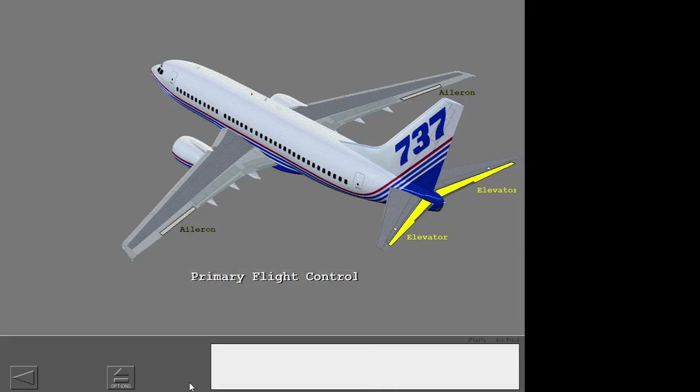Pilots use the primary and secondary flight control surfaces to move the airplane in flight. The primary flight controls are the ailerons, the elevators, and the rudder. The secondary flight controls are the spoilers and the high lift devices.

The spoiler speed brake system is made up of flight and ground spoilers. The flight spoilers can move to aid the ailerons with roll control, or they can be used to slow the airplane. After landing, the ground spoilers deploy with the flight spoilers to slow the airplane.

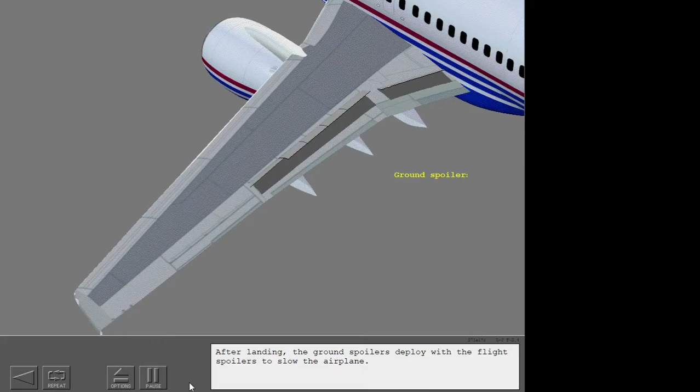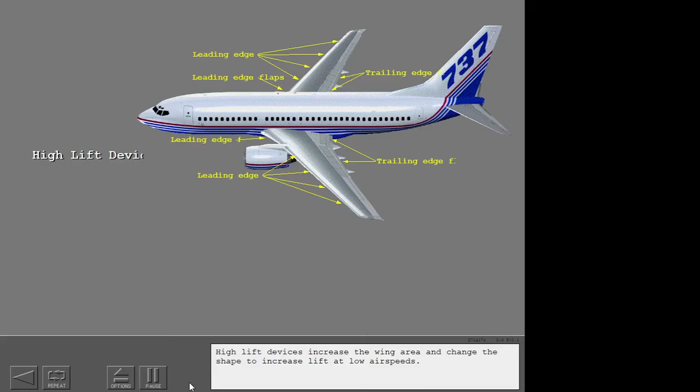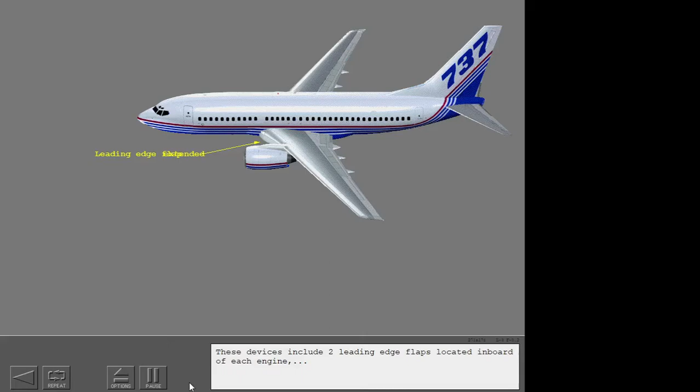High lift devices increase the wing area and change the shape to increase lift at low air speeds. These devices include two leading-edge flaps located inboard of each engine, four leading-edge slats located outboard of each engine, and inboard and outboard double-slotted flaps on the trailing edge of each wing.

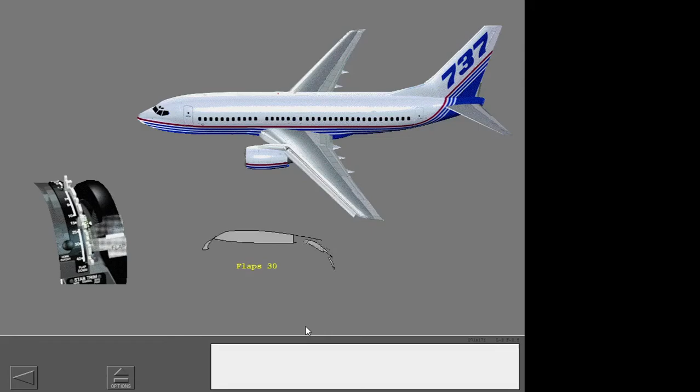Flap positions 1 through 15 supply increased lift with only a small change in drag. Flap positions more than 15 supply increased lift and drag to permit slower approach speeds and better airplane control.

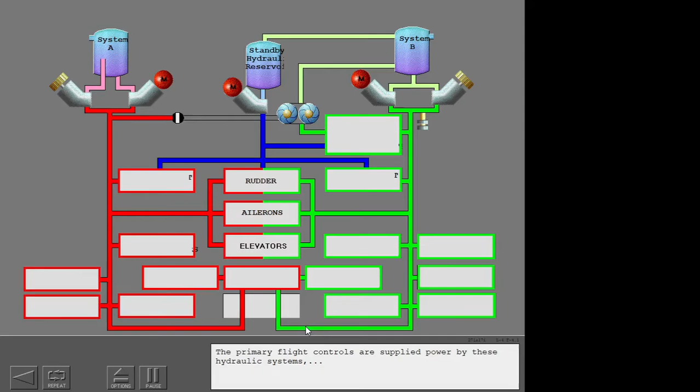The primary flight controls are supplied power by these hydraulic systems, and the secondary flight controls are powered by these.

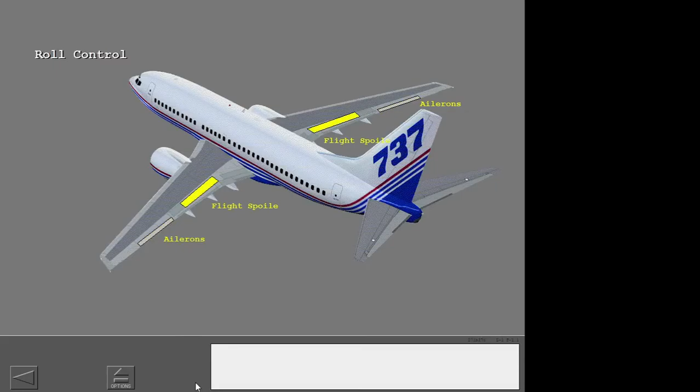The ailerons are the primary surfaces for roll control. The flight spoilers assist the ailerons.

Roll commands come from the control wheels and the autopilot. The control wheels are connected to each other and then connected by cables to the aileron power control units, or PCUs.

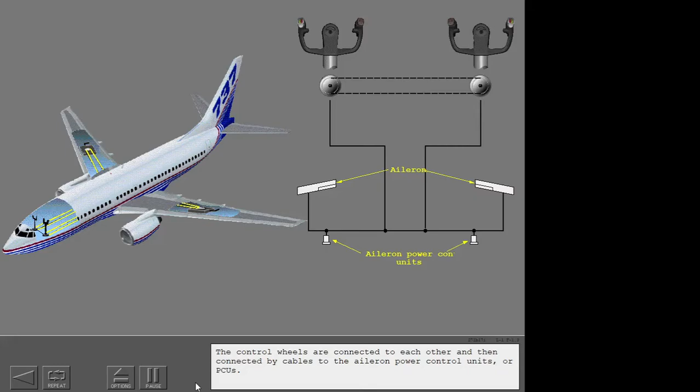Hydraulic systems A and B supply power to the aileron PCUs and the flight spoiler PCUs.

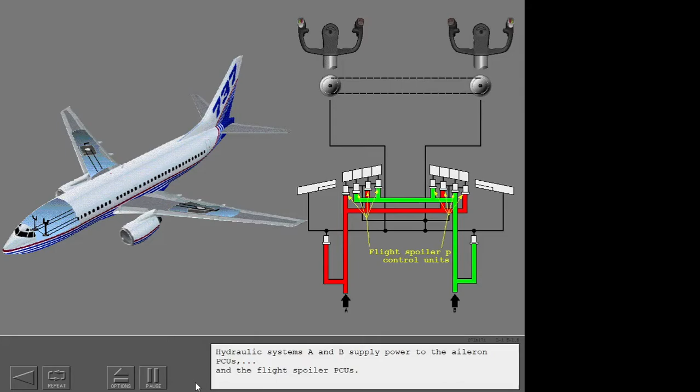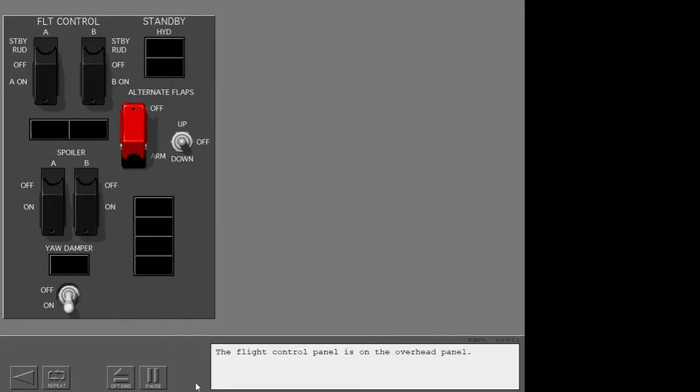The flight control panel is on the overhead panel. The flight control switches are usually in the guard closed on position, which lets the related hydraulic system supply power to the flight control system.

The spoiler switches are for maintenance personnel to do system tests.

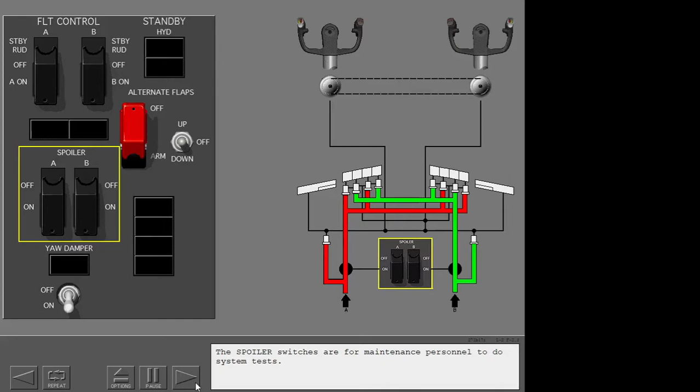Controls for the aileron trim system are at the aft end of the aisle stand. The aileron trim indicators are on the top of the control columns.

The aileron trim switches send an electrical signal to the feel and centering mechanism to set new aileron and control wheel positions. The trim switches must move together for the system to work.

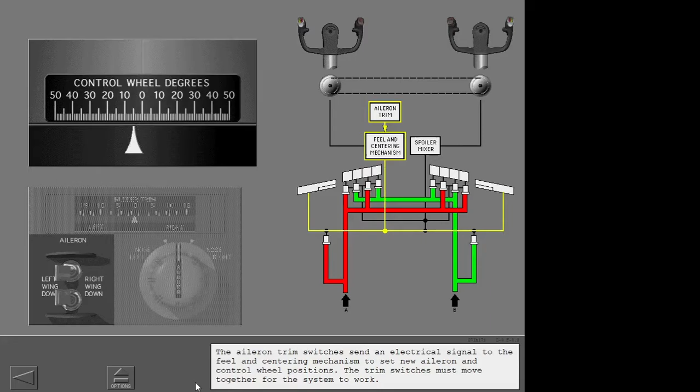When the autopilot is engaged, the autopilot roll channel moves a cable to the feel and centering mechanism, which in turn moves a cable to the aileron PCUs.

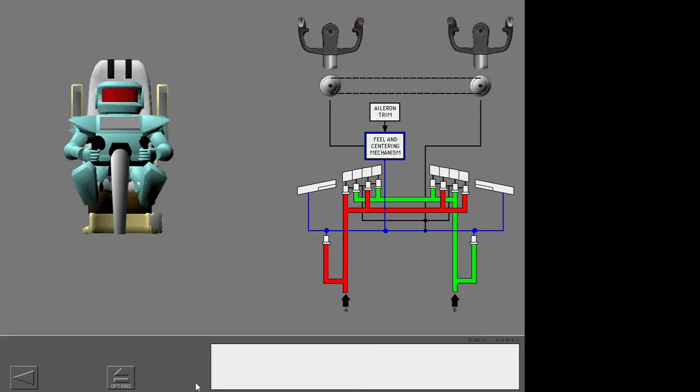The four flight spoilers help the ailerons to roll the airplane. The spoilers are hydraulically operated. The flight spoilers start to move after more than 10 degrees of control wheel movement.

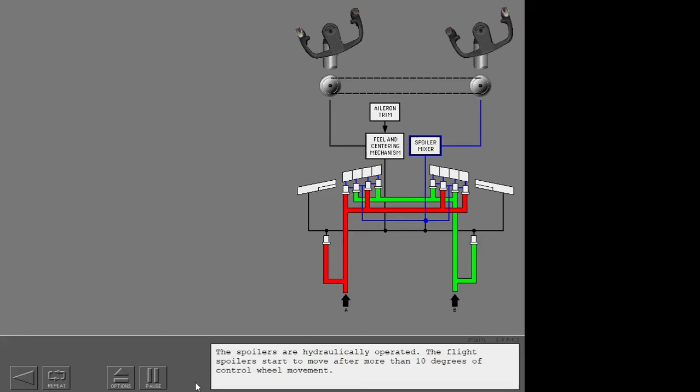In a turn, the spoilers come up to kill lift on the wing with the up aileron and stay down on the wing with the down aileron.

Now let's look at some non-normal situations. If you experience jammed ailerons or spoilers, the transfer mechanism allows you to roll the airplane.

If the ailerons jam, force applied to the first officer's control wheel operates the spoilers to roll the airplane. The captain's control wheel does not move.

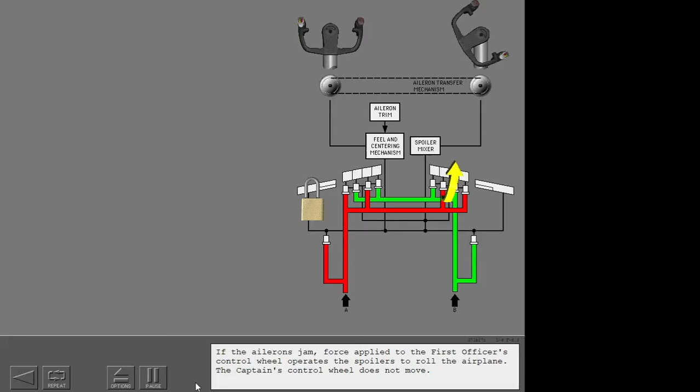If the spoiler system jams, force applied to the captain's control wheel operates the aileron to roll the airplane. The first officer's control wheel does not move.

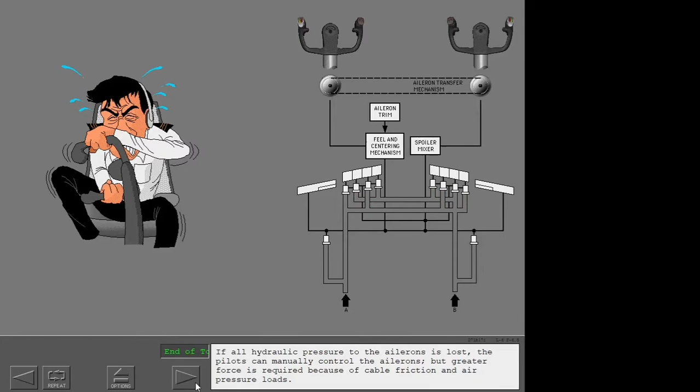If all hydraulic pressure to the ailerons is lost, the pilots can manually control the ailerons, but greater force is required because of cable friction and air pressure loads.

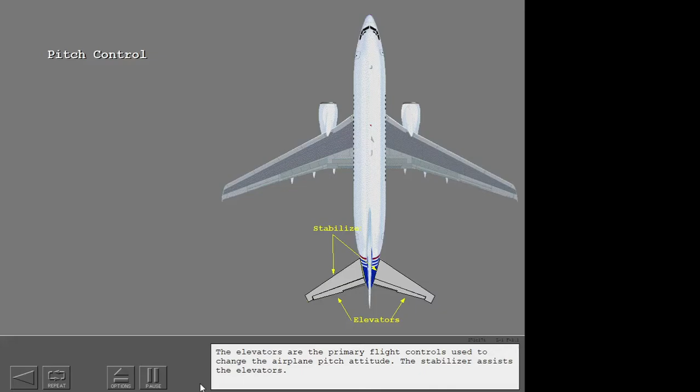The elevators are the primary flight controls used to change the airplane pitch attitude. The stabilizer assists the elevators.

The elevator is moved by the control columns, autopilot, and Mach trim system. The control columns are connected to each other by the transfer mechanism, which allows elevator control if a part of the elevator system jams,

and to cable systems, which connect the control columns to the elevator PCUs. The PCUs use hydraulic system A and B pressure to move the elevators.

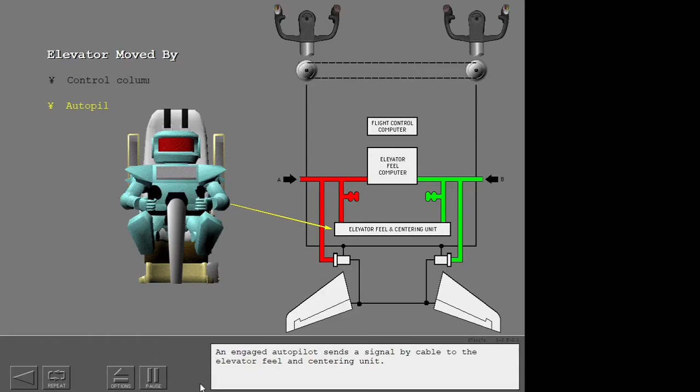An engaged autopilot sends a signal by cable to the elevator feel and centering unit.

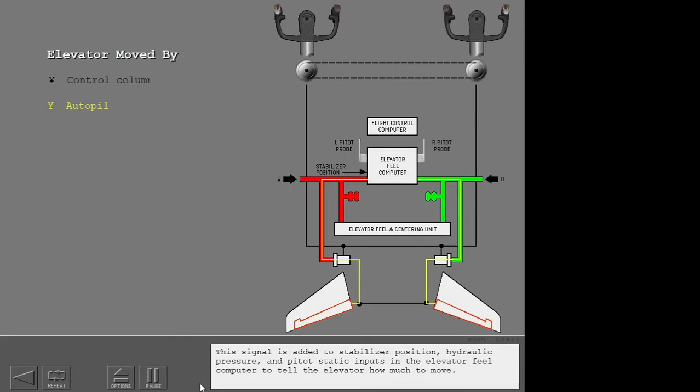This signal is added to stabilizer position, hydraulic pressure, and pitot-static inputs in the elevator feel computer to tell the elevator how much to move.

The elevator feel and centering unit supplies artificial control feel to the pilots through the control column.

As swept-wing airplanes, like the 737, increase airspeed toward Mach 1, they start to pitch down because of the aerodynamic forces on the airplane.

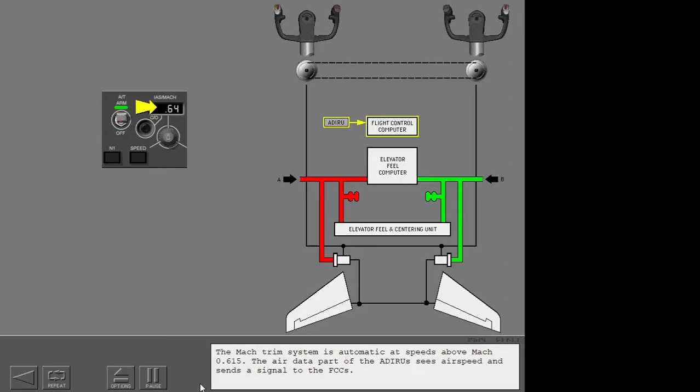The Mach trim system is automatic at speeds above Mach 0.615. The air data part of the ADIRUs sees airspeed and sends a signal to the FCCs.

The FCCs send a command to the Mach trim actuator, and the actuator tells the feel and centering unit to make an elevator adjustment.

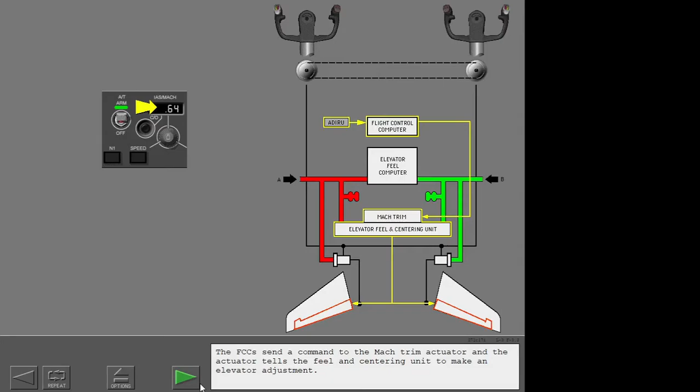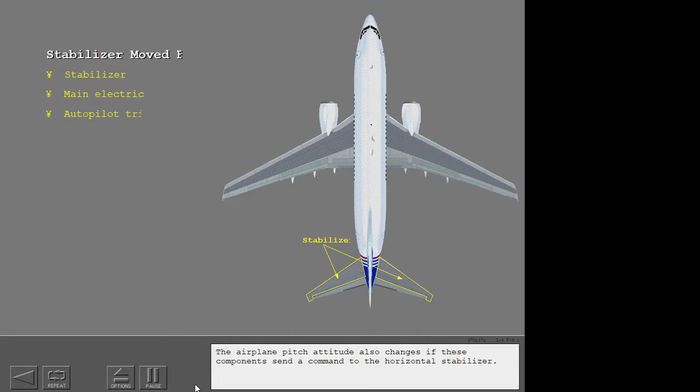The airplane pitch attitude also changes if these components send a command to the horizontal stabilizer. Cables transmit manual commands from the pilot's stabilizer trim wheels to the stabilizer.

The two control wheel trim switches send electrical signals to the two-speed main electric portion of the trim motor to move the stabilizer. These switches must be moved together.

With the flaps extended, the trim moves faster than with flaps up.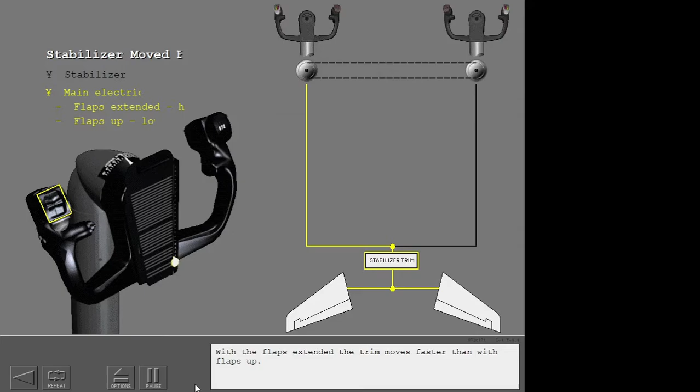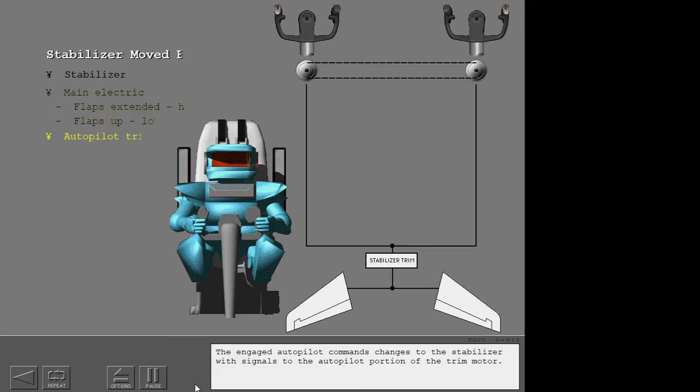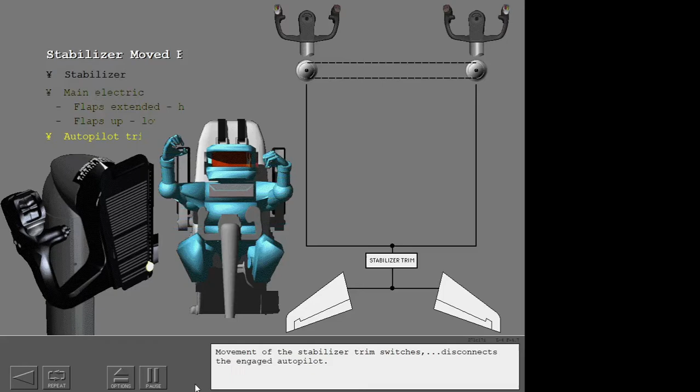The engaged autopilot commands changes to the stabilizer, with signals to the autopilot portion of the trim motor. Movement of the stabilizer trim switches disconnects the engaged autopilot.

Most controls and indicators for the stabilizer trim system are on the control stand. The stabilizer trim indicators point to the units of stabilizer trim, and the green bands show the approved takeoff trim range.

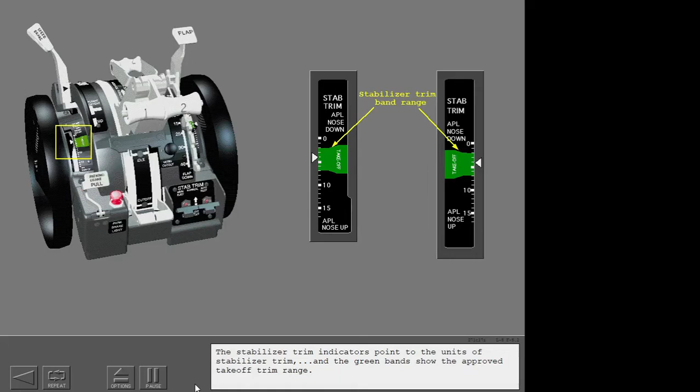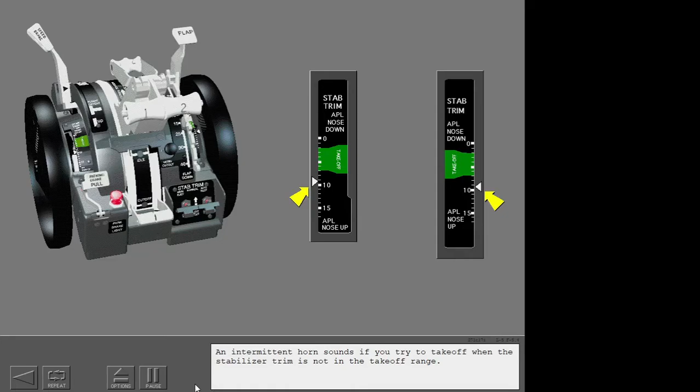An intermittent horn sounds if you try to take off when the stabilizer trim is not in the takeoff range.

An automatic speed trim system adjusts trim to improve manual flight characteristics. The system operates when the autopilot is disengaged and there are airplane conditions of low gross weight, aft center of gravity, and high thrust.

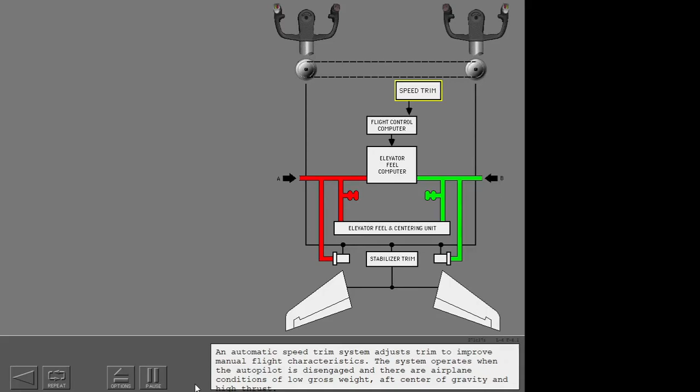The system most frequently operates during low speed, high thrust conditions such as takeoff or go-around.

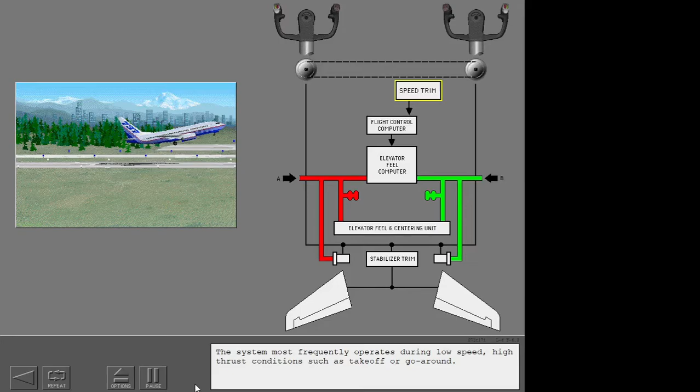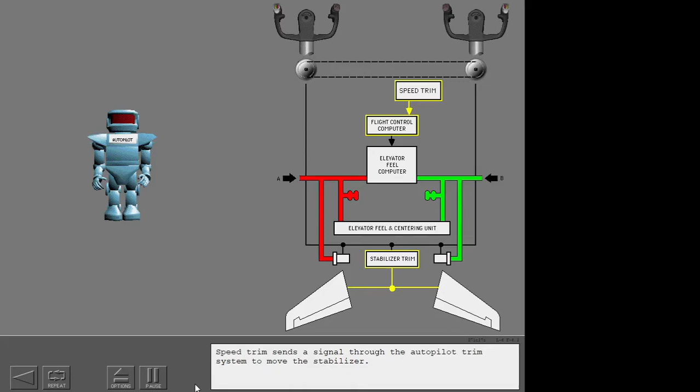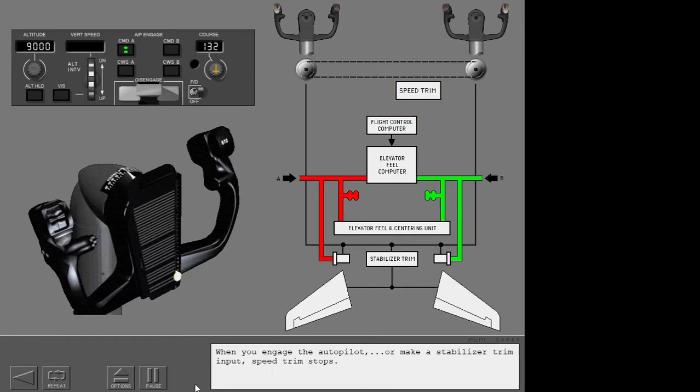Speed trim sends a signal through the autopilot trim system to move the stabilizer. When you engage the autopilot or make a stabilizer trim input, speed trim stops.

Now let's look at some non-normal indications.

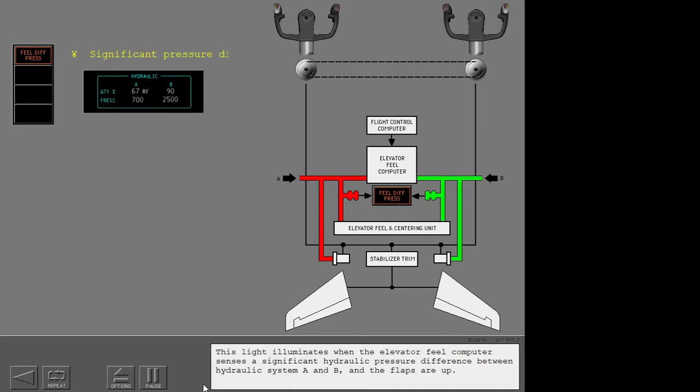When the feel differential pressure light and the lights that follow come on, they cause the master caution and annunciators to also come on. This light illuminates when the elevator feel computer senses a significant hydraulic pressure difference between hydraulic system A and B and the flaps are up. The feel system will operate with only one hydraulic system. This condition does not require crew action in flight. An air pressure differential caused by a blocked pitot tube will also cause the feel differential pressure, master caution, and flight control's annunciator lights to come on.

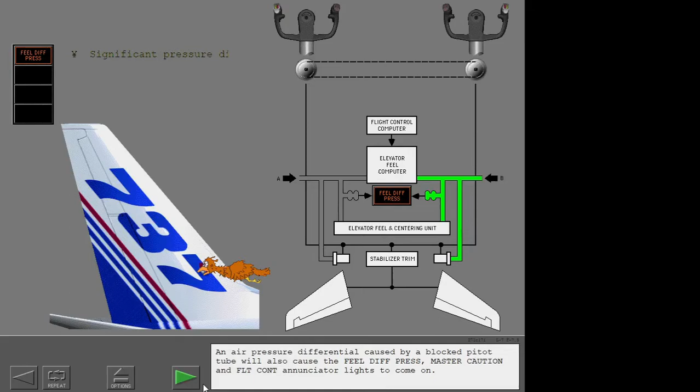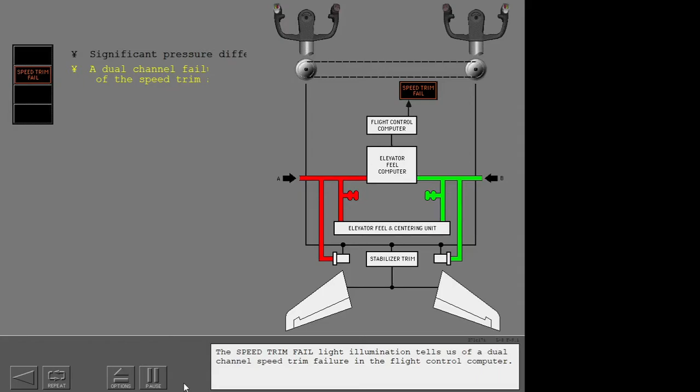The speed trim fail light illumination tells us of a dual-channel speed trim failure in the flight control computer. A single-channel speed trim failure makes the master caution light and the flight control annunciator come on when the master caution system recall is activated. No crew action is required in flight for a single or dual failure.

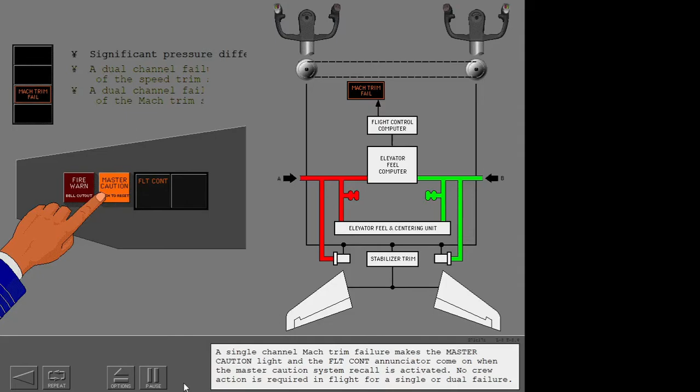The Mach trim fail light and master caution lights illuminate if there is a dual-channel Mach trim system failure. A single-channel Mach trim failure makes the master caution light and the flight control annunciator come on when the master caution system recall is activated. No crew action is required in flight for a single or dual failure.

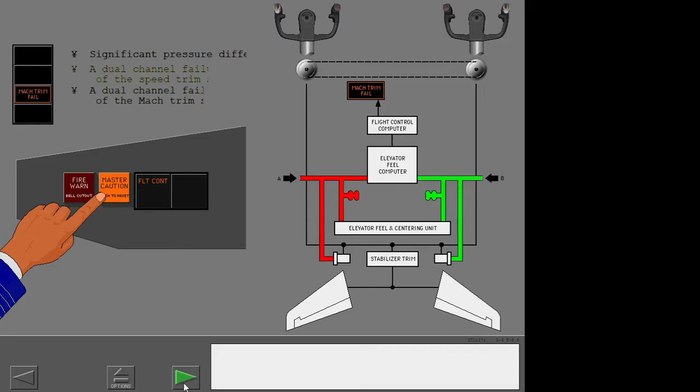The stab out of trim light can illuminate for a moment if the autopilot requires a large trim change and the stabilizer is not in the correct position. When the stab out of trim light illuminates for a longer time, a malfunction has occurred. This could require you to hold the control wheel, disconnect the autopilot, and trim the stabilizer.

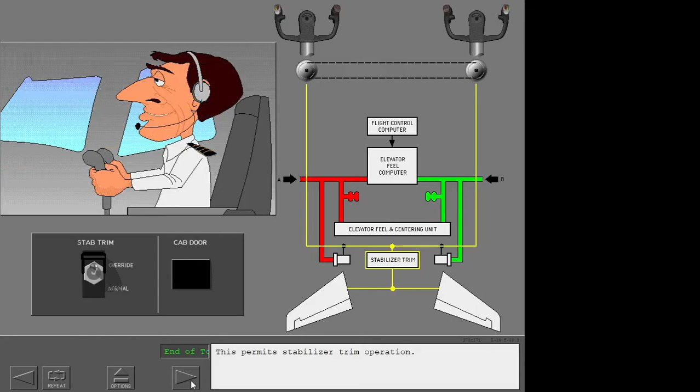If you move the control column opposite to the trim system, or the control column is moved out of the usual range, a cutout switch stops all stabilizer trim operation. When stabilizer trim is stopped out of range, move the stabilizer trim override switch to override. This permits stabilizer trim operation.

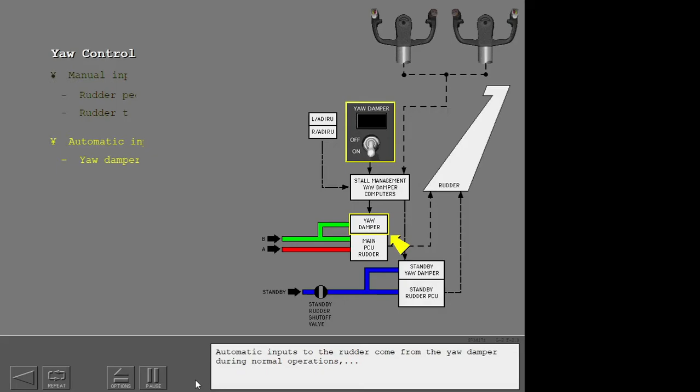The rudder controls yaw, the movement around the airplane's vertical axis. The one-piece rudder is attached to the vertical stabilizer. With hydraulic power, you can adjust the rudder through the rudder pedals or the rudder trim system. Automatic inputs to the rudder come from the yaw damper during normal operations or from the standby yaw damper during manual reversion flight.

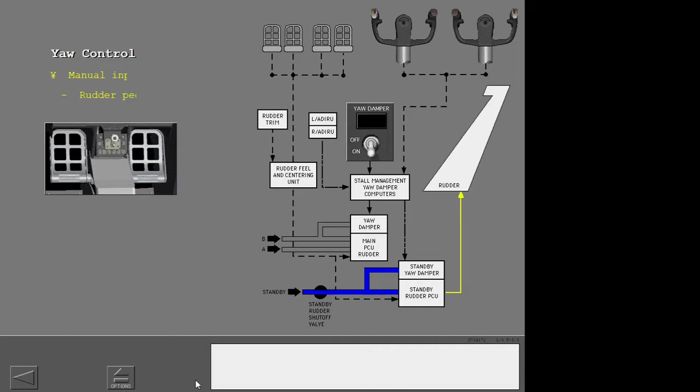The yaw damper operations are controlled through two stall management yaw damper or SMYD computers. Rudder pedal inputs move cables to the feel and centering unit and the rudder PCUs. The feel and centering unit sets the rudder pedal position and feel. The main rudder PCU uses hydraulic systems A and B pressure to move the rudder. A standby rudder PCU is supplied power by the standby hydraulic system. It operates when hydraulic systems A and B are not available. One of the PCUs can supply rudder control.

The rudder trim system can move the rudder to remove unwanted forces from the rudder pedals. Rudder trim inputs change the feel and centering unit neutral point. This makes the rudder pedals and the rudder move.

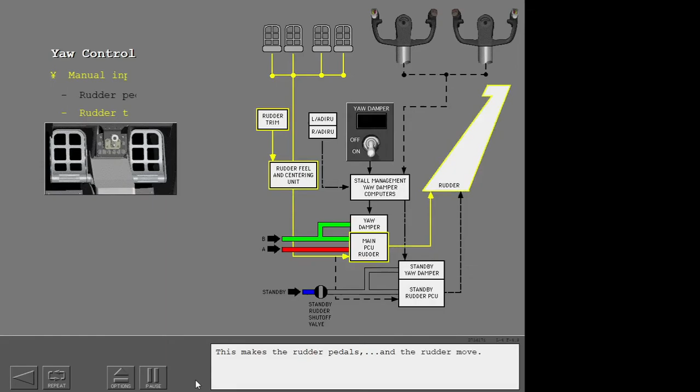The rudder trim control and indicator are on the aft electronic panel. You can turn the rudder trim control to the left or right to change rudder trim. The indicator shows the rudder's trimmed position. This flag is in view if electrical power to the trim indicator is lost.

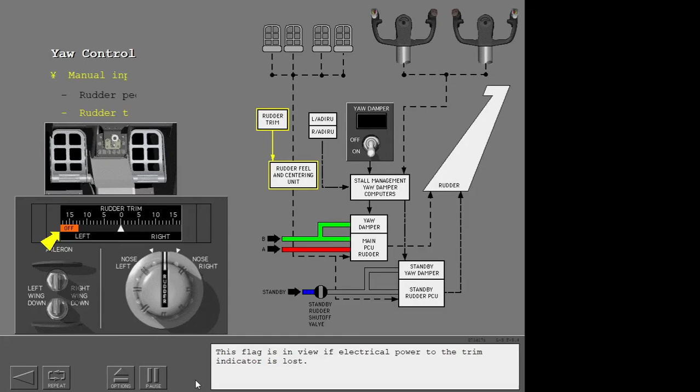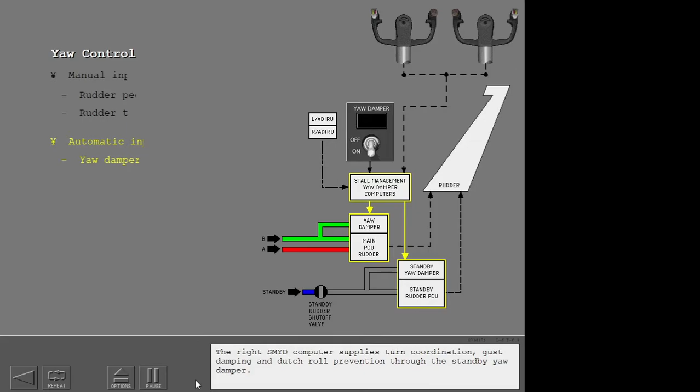The yaw damper prevents Dutch roll. It also helps with turn coordination and gust damping. Yaw damper electronics are in the two-stall management yaw damper computers. The left SMYD computer supplies yaw damper inputs to the main rudder PCU to tell how much to move the rudder. The right SMYD computer supplies turn coordination, gust damping, and Dutch roll prevention through the standby yaw damper.

The ADIRUs send speed and yaw rate data to the stall management yaw damper computers. ADIRU data is added to control wheel inputs and sent through the yaw damper to tell the PCUs how much to move the rudder.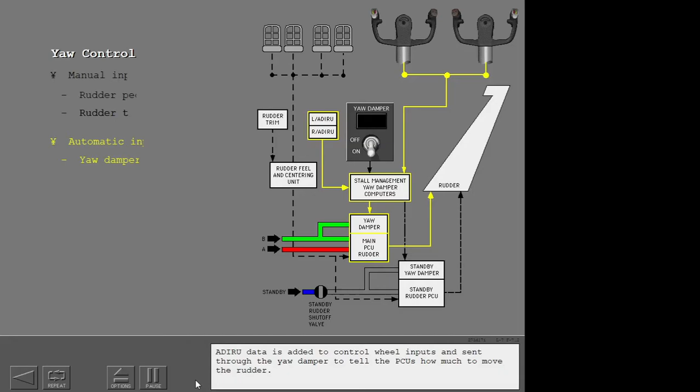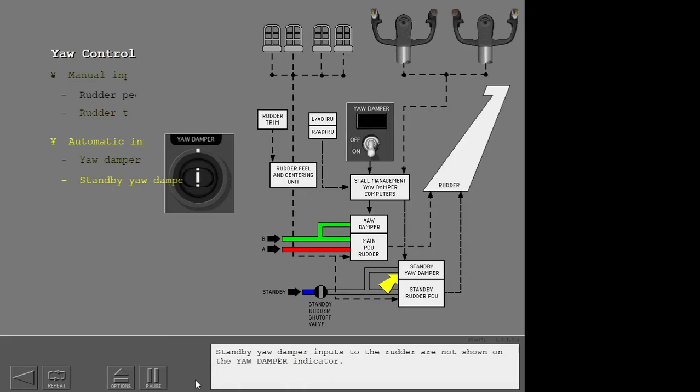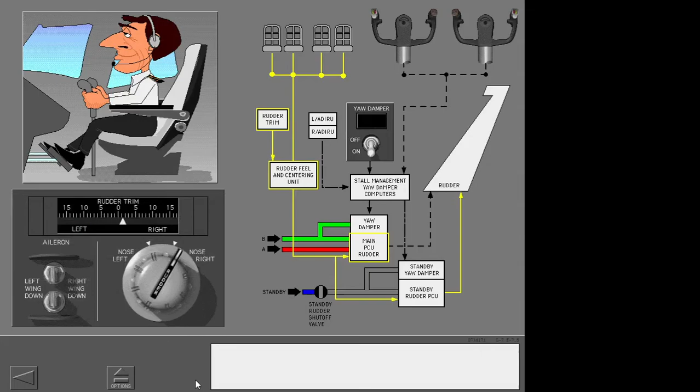The yaw damper indicator shows the inputs to the rudder, but the rudder pedals do not move. Standby yaw damper inputs to the rudder are not shown on the yaw damper indicator. Pilots can override either main yaw damper or standby yaw damper inputs with the rudder pedals or rudder trim.

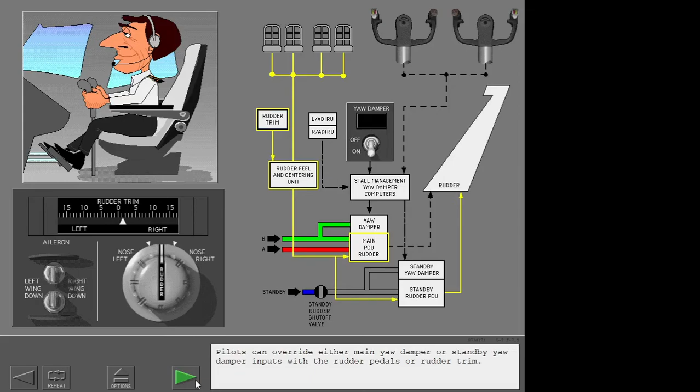Now let's look at some non-normal situations.

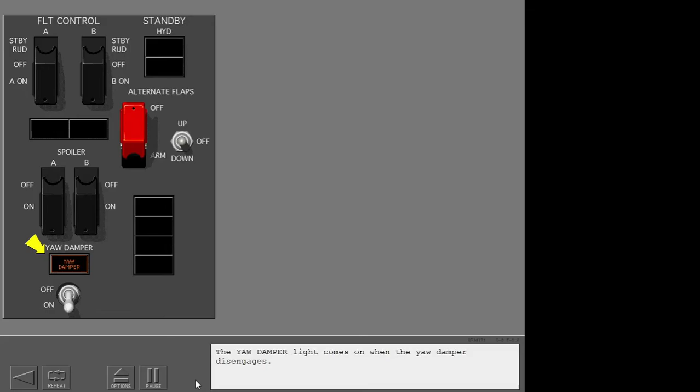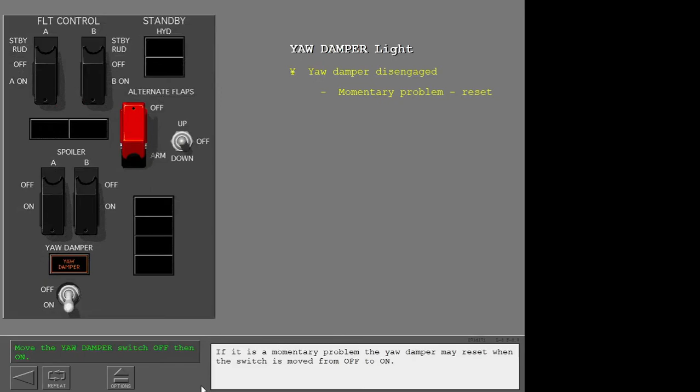The yaw damper light comes on when the yaw damper disengages. If it is a momentary problem, the yaw damper may reset when the switch is moved from off to on.

The yaw damper does not operate if hydraulic system B is not available. In this condition, the yaw damper switch moves to off and the yaw damper light illuminates. Move the System B flight control switch to standby rudder.

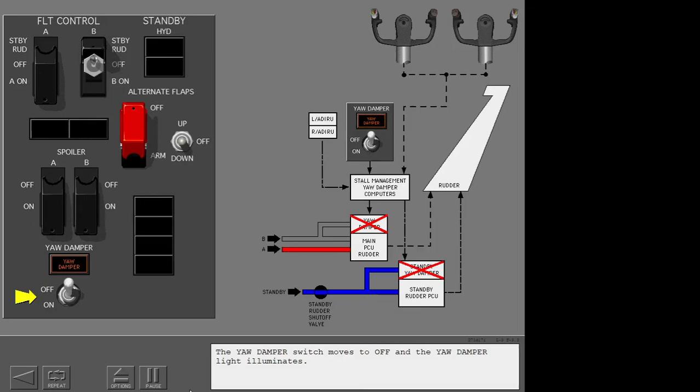The yaw damper switch moves to off and the yaw damper light illuminates. The yaw damper cannot be engaged when only System B is inoperative.

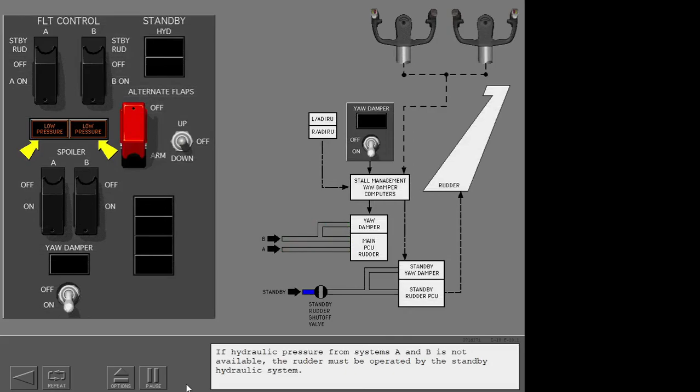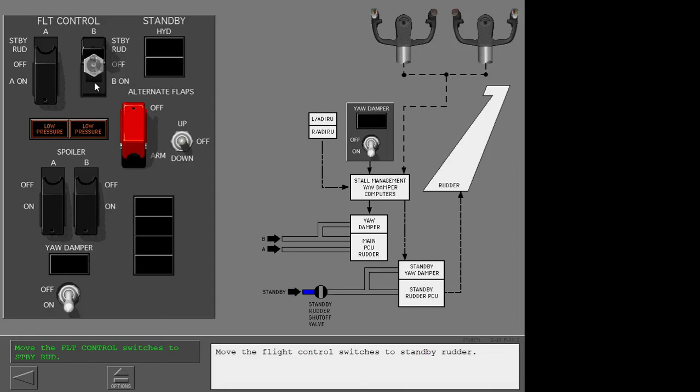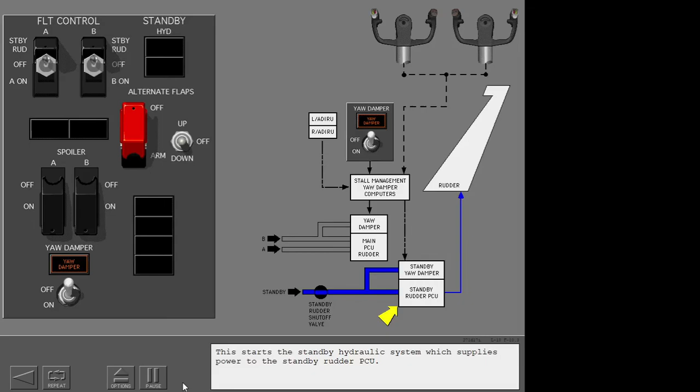If hydraulic pressure from systems A and B is not available, the rudder must be operated by the standby hydraulic system. Move the flight control switches to standby rudder. This starts the standby hydraulic system which supplies power to the standby rudder PCU. Move the yaw damper switch to on. Yaw damper protection is now available through the standby yaw damper.

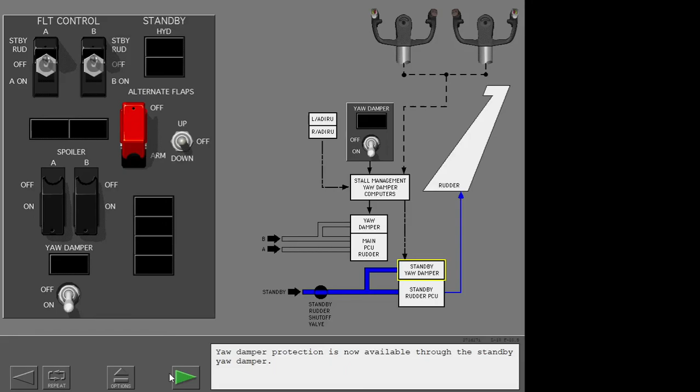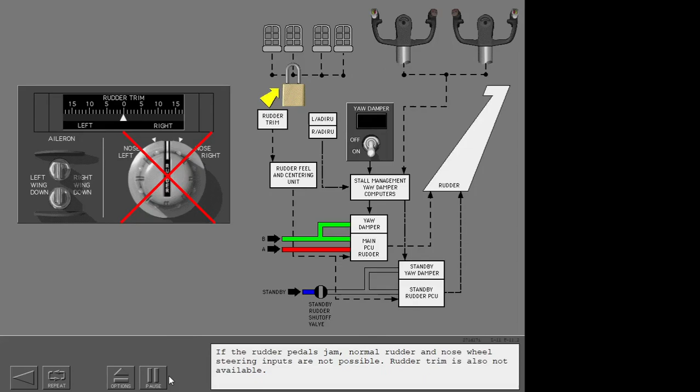If a rudder cable fails in flight, use the rudder trim to make rudder inputs. If the rudder pedals jam, normal rudder and nose wheel steering inputs are not possible. Rudder trim is also not available. If you think frozen water caused the jam, descend when possible to warmer air.